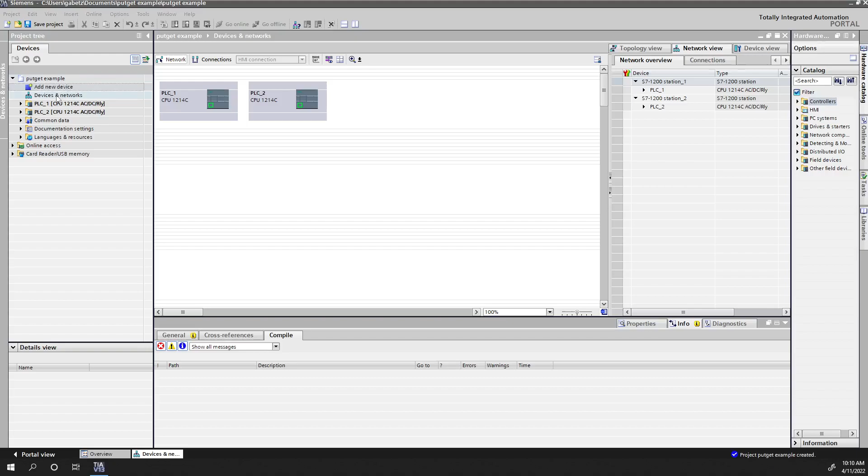So on the screen in front of you, I have the networking screen, or the devices and networks in the project tree. And we're going to first hook up a network. So we're going to go green box to green box. You're going to click and drag and then drop it in the other one. And you'll now see that it says PN/IE. All right, so that is our Ethernet connection.

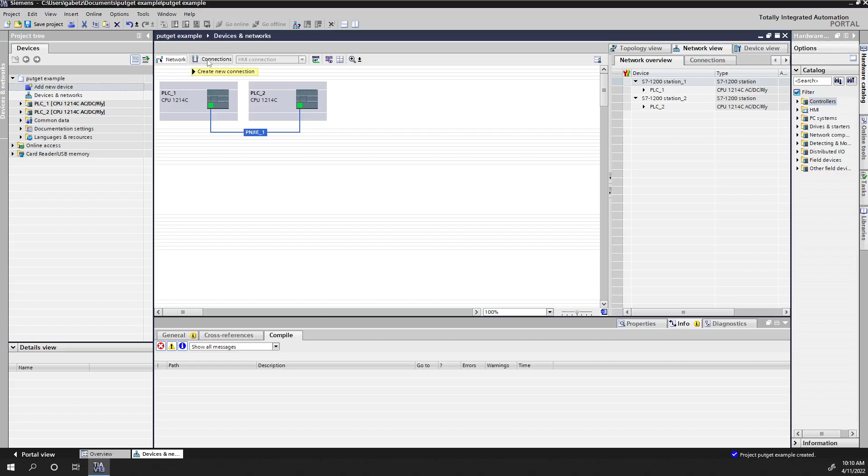Next, we need to set up an S7 connection. So we're going to go to connections, not network anymore. And we're not going to do HMI, we're going to do an S7 connection. And you're going to do the same thing. Click on the green box, drag it over, drop it in the other green box, and you should now see it says S7 connection 1.

Now, next, we need to modify our IP addresses. The software defaults to 192.168.0.1 for the first PLC, .2 for the second, and so on. But I just want to go through how to change those, because it's definitely nice to be able to pick what you want. If we right-click on the PLC and say Properties, that'll bring up our window. And under the Profinet interface here, if we scroll down a little bit, you can see your IP address.

So this is the first PLC. That is .1. For my purposes, I'm going to do 55 for my first one, and I'm just going to say OK. And then for the second one, I'm going to make it 57. The reason we're doing this is that if we hook all of our PLCs in our lab up together, they will all have their own dedicated IP instead of having conflicts with each other. So we're adding 50 to the number that is written on our PLC, but that all depends on your setup.

At this point, we should be able to download this, but we won't be able to communicate yet because we haven't set up anything to communicate. Next, we need to go back into the properties for each of those because I forgot. Scroll down on the left-hand side and go to Protection, and then keep scrolling. It doesn't look like you can scroll down very far, but you've got to keep scrolling. Then we've got to check permit access with PUT/GET communication from remote partner on both of them. So go ahead and set up both of those.

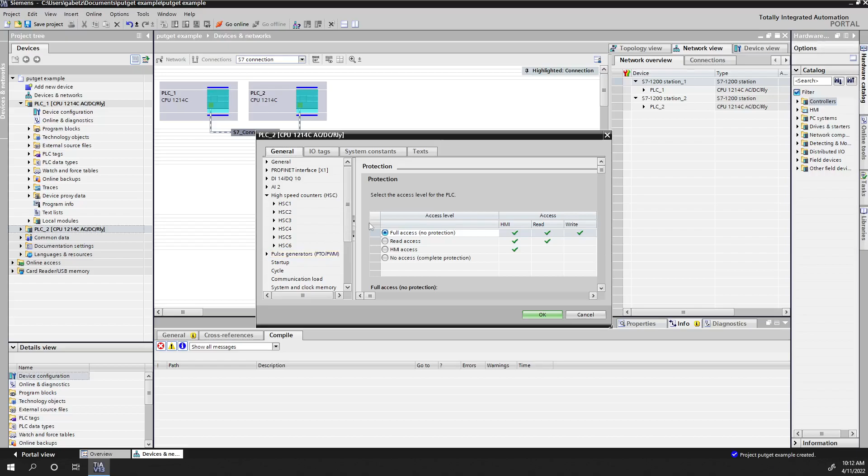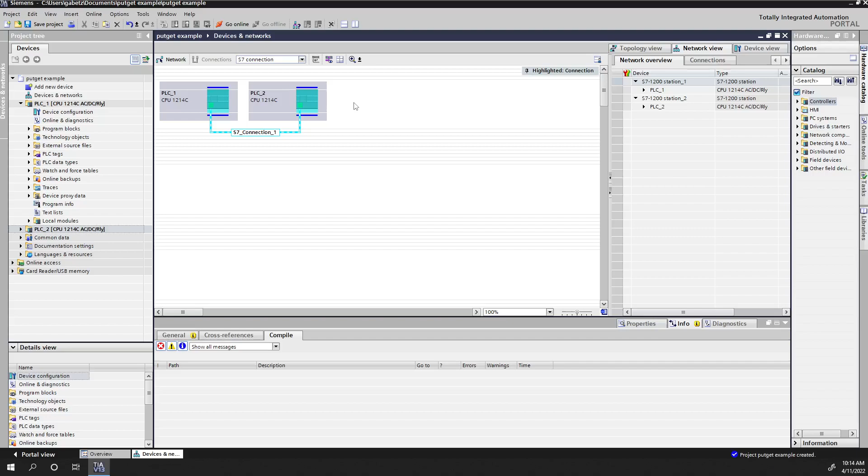All right, so we've got our PLCs networked, we're allowing access, we've got our IP addresses set up to what we want them to be. So that is the first good step. Next, we're going to come into program blocks and do add new block here. So far, all we've done in this class is use the main block, OB1, our organization block.

There's a whole bunch of other options in here that you could use, like first cycle or time delay or specific time of day. We're not touching those. What we're going to be using is a data block. This is just a place for us to store information. It's like tags, except it takes all those tags and puts them into one little thing, like how our counters and timers work.

You know how we have all those different tags kind of grouped into one block? The exact same idea here, except this is one we're creating, which is kind of nice. So I'm going to call this one send. And I'm going to give it a manual number of 100, just to make my life easier. You shouldn't need to change the number. From everything I've tested, the number doesn't matter, but it's nice to do that, in my opinion. And then you're going to go hit OK.

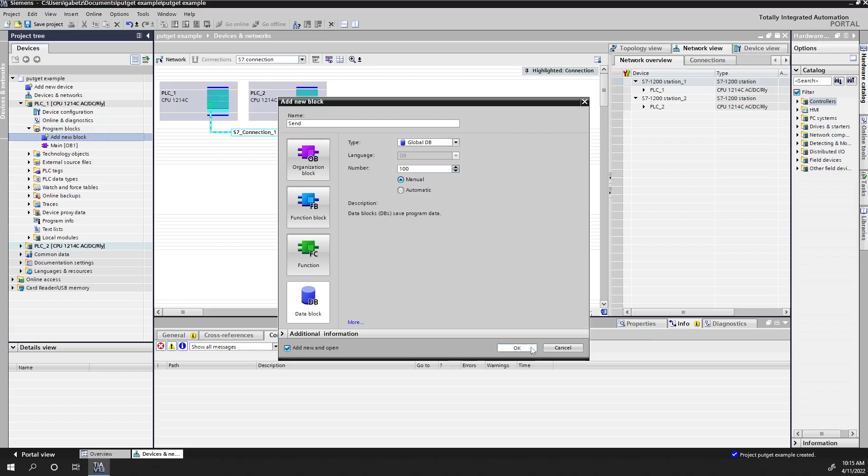And I'm just going to create 8 bits. So I'm just going to call it B1, B2, B3, B4, B5, B6, B7, B8. And then once you do that, you need to go to your second PLC and create the exact same thing, except I'm going to call mine receive this time. And it's going to have the same bytes. So I'm just going to copy these, and I'm going to go create the other one, and I'll be back when that is done.

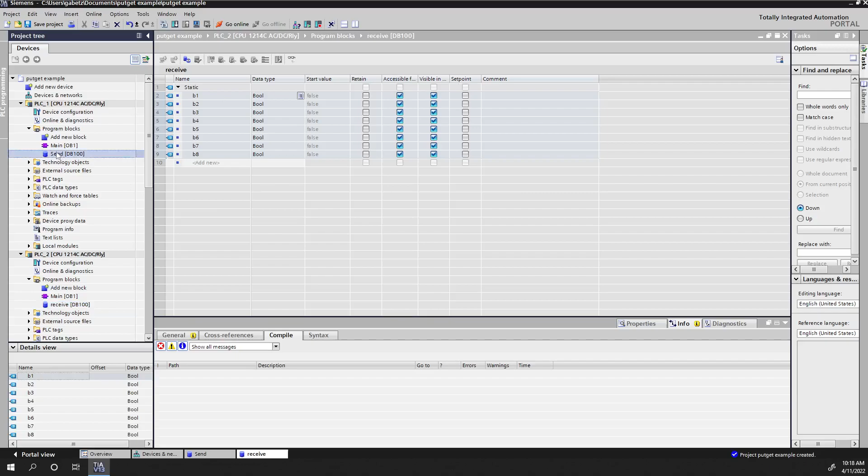All right, now that we have those data blocks created, here's my receive one, which we're seeing here, and here's my send one. They look exactly the same, holy moly. Actually, I didn't change. There we go. There's my send. So what we're going to have to do now is change the attributes of this. So on each of those data blocks, you're going to right-click. You're going to go down to Properties.

And here in the Attributes section, so come down all the way to Attributes, we need to unoptimize block access. And then hit OK. And we need to do that to both of them. If you do not do this, it will error out on you. So make sure you unoptimize both send and receive.

All right, now, one thing I forgot to turn on in the properties, at least for PLC1, is to enable the clock, so that way we can be constantly sending information. So you are going to open properties back up for PLC1, go to system and clock memory, and I like to enable both. Every once in a while, the always false comes in very handy. So I like to hit both checkboxes. But really what we care about for today is the clock memory bits. And then go ahead and hit OK.

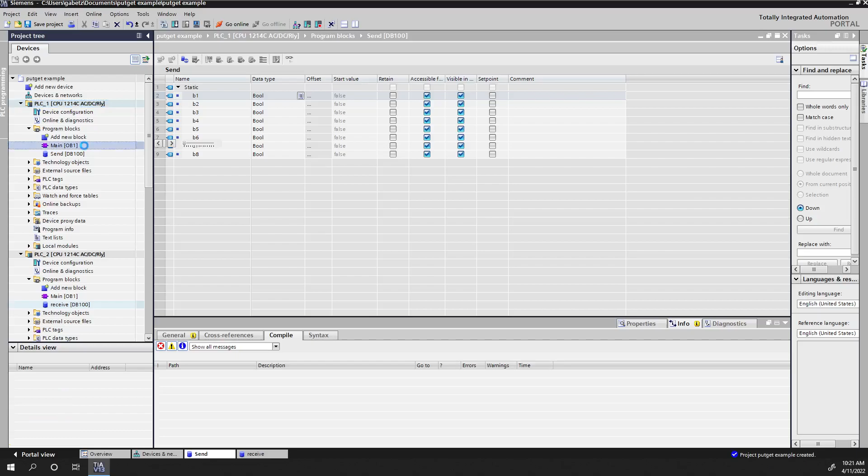After you have that, it's time to go into our main instruction. So go ahead, open up the main block, and we'll be right back.

All right, so now we are going to add a data bit that we're going to change. So we're going to put a make contact and then a coil. For my make, I'm going to go with clock, and I'm going to go with half a hertz so that we're sending as slow as possible. We're changing this one. And then I'm going to make this my send, and I'm going to make it B1. It really doesn't matter which bit you're using. We just want to be able to have one changing so we can actively see something is going on. That is what we really care about.

So just a make with a 0.5, and again, I want this to be slow. That way we can actively see it on the receiving side in the software. The PLC will probably update a lot quicker, but remember our software only updates about once every 3 seconds. So if you go too quickly, you're not going to see anything actually happening on the screen. It will happen in the PLC, but not actually on the screen. So that's why I went with the half hertz there.

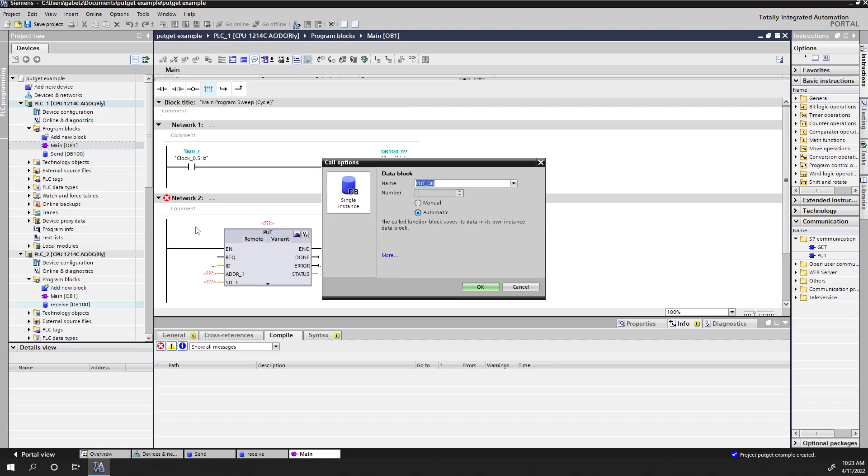And I'm going to just type in PUT and then hit enter. Enter again, and boom, it pops it up for us. So that's my personal preference. Data block name at this point, it just put DB, is perfectly fine. So we're just going to say okay.

Now, REQ, this is one of the ways that we can make it actually send information. This command works by every time either the put command becomes true or REQ becomes true, from my understanding, it will actually either send or get information. So it's not actually constantly happening unless we make it constantly happen. So for our purposes, we're going to put a clock bit in there of 1 hertz. So that way, every second, it will go and get the information. Or in this case, put the information, since that's the command type we are using.

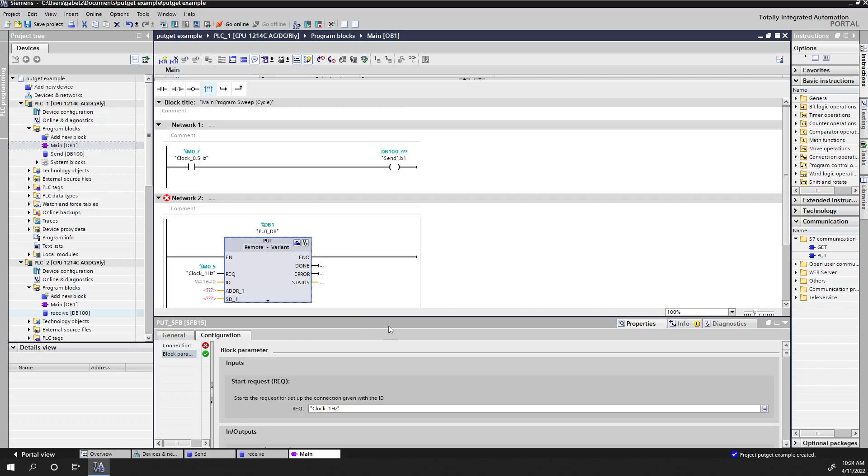Next, we need to click on the little home here, and that will bring up our block parameters. So our connection we need to set up. We need to select our partner PLC, which in this case is PLC2. So I'm going to go ahead and select that. And notice it does fill in the information for us right there. So that takes care of a lot of the hard work for us. And this is because we've already set it all up. If we hadn't gone through the devices and networks in the very beginning, this would be causing more problems than help at this point in time.

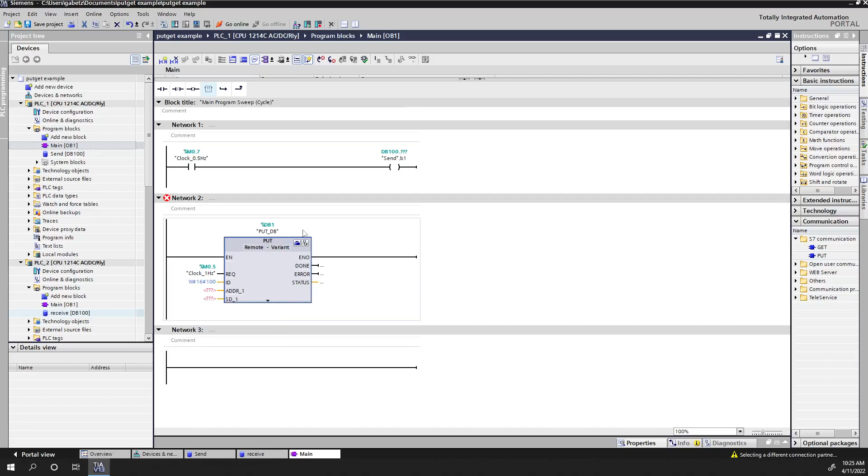All right, now we need to go back to our block parameters. Now, since we are in the easy mode, I'm going to call it, we only have 1 write area and 1 send area. If we were in the advanced mode, and by getting to advanced, I mean you click the little drop-down arrow here, notice you get 4 addresses for write area and 4 for the send area. That is very useful, but for our purposes right now, we only need the one. So we're going to specify the area to be written.

So the start area, the write area, this is the destination address. Now, I put 100 for both of my addresses, both on my send PLC, PLC1, and on my receive, which is going to make these things identical, which is kind of nice. At the same point, I can understand how that could get confusing for people. So if you made them different, that's probably the better choice, but I made mine the same, so that way I could have the exact same thing in both spots.

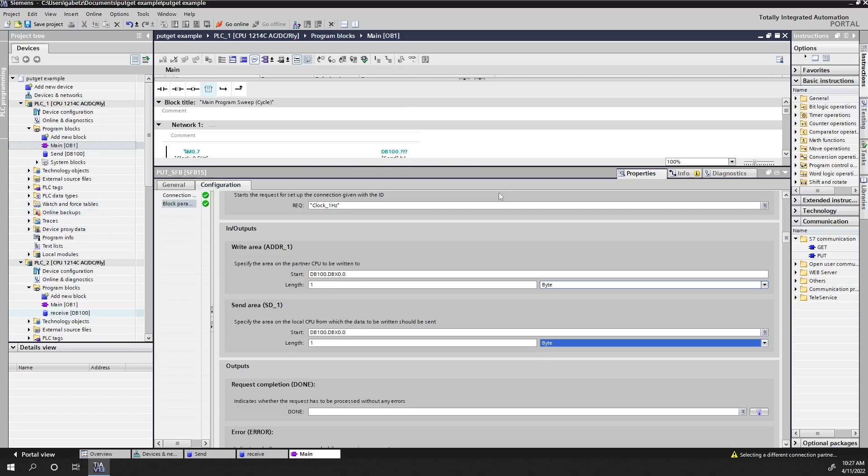So our start location, we are using a database. So we are doing DB, and for mine it's 100. That's our database. And then period, DBX 0.0. That is the start location. So this is where we are starting. Our length, we're going to do 1, and then our data type is going to be byte. And then we're going to copy that and do it in the send area as well. 1 byte. And that should be all that we need to get this to work.

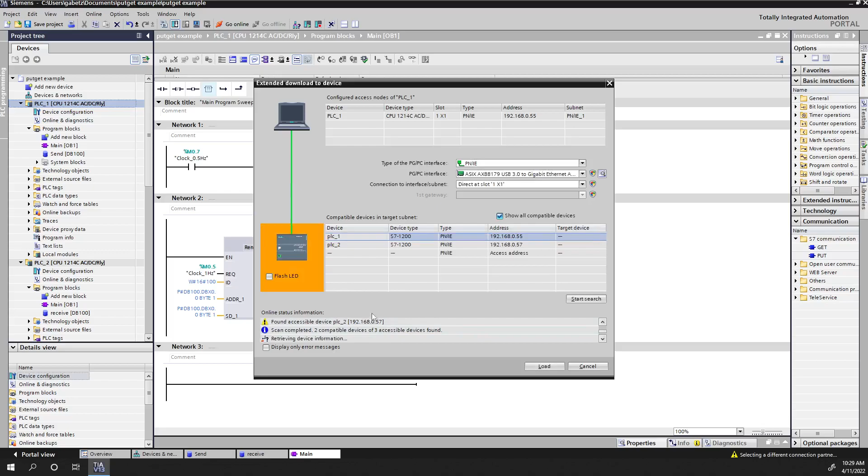All right, now that we've got all that set up, we can go ahead and start downloading to our PLCs. Now, we haven't done this yet in this project, so it is going to take a little bit longer than usual. So we're going to do our search, and in my case, my PLC IP addresses should already match, which is nice. I also do have an HMI on the network, which is why I've got an extra 151 coming up. But I'm going to go ahead and load PLC 55 first, and then I'll load 57, and then we'll be back.

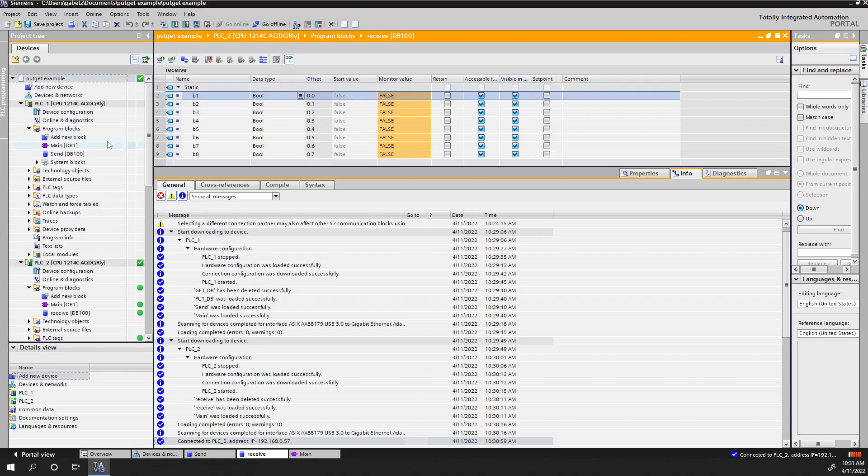All right, now that you got your PLCs downloaded, we can go check our receive table. So I have my receive table, as you can see in the top center, it says receive. And if we actually go to put our sunglasses on, we should see bit 1 alternating true and false, and that is from the main code. And if we actually look at the main code here, you'll see on PLC2, there is nothing. So there's no reason that bit should be changing other than the fact that we are getting the information from the network. And that, in a nutshell, is how you do put and get.

You can, from my understanding, directly access your actual tags, but it might be better to use databases to keep things organized for what data is being sent and received. So that is up to you. All of these are actually being sent. So if I would come up here to my send data, and I would come look at one of these, and I would modify my B4 to be a 1. Let's go ahead and do that. If I go back to my receive one, you should see that, yep, and we are on receive right there, that B4 is true. So you can just modify them manually. It's nice having that clock pulse it out for you.

If you have problems, there are so many different things that could cause them. Too many to list here, and so many of them that I don't understand. So this is just a real basic how to get PutGet working in a brand new file. I've had problems with files that already exist, so hopefully you can figure that one out from this video.